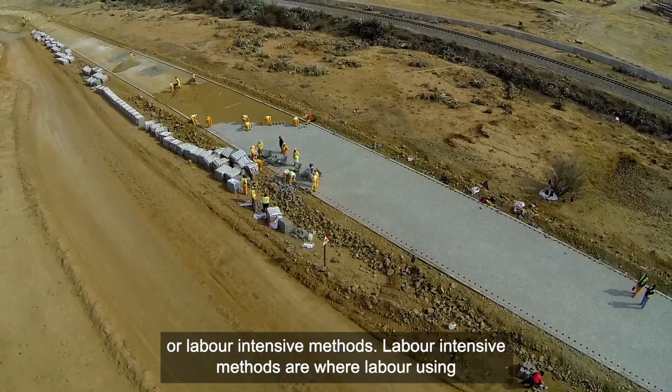What is the link between roads and the climate crisis? Roads are primarily designed for the transportation of people and goods from one place to another, safely, comfortably, and expeditiously. Roads can be constructed using machines or labor-intensive methods. Labor-intensive methods are where labor using hand tools is the primary resource and is supported by light equipment if necessary, thereby creating more employment.

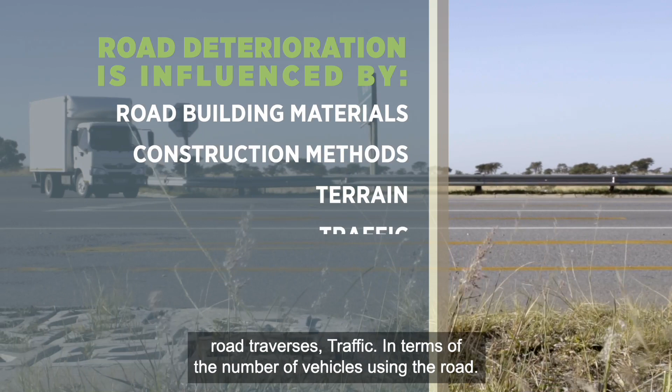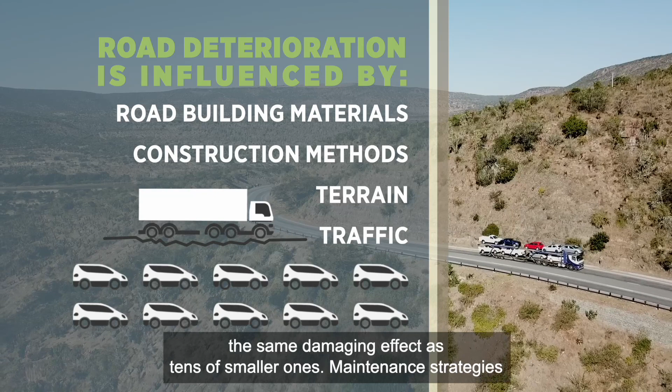Traditionally, road deterioration is largely influenced by the following variables: road building materials, construction methods, terrain along which the road traverses, traffic in terms of the number of vehicles using the road, and the proportion of heavy vehicles to small ones. One heavy vehicle has the same damaging effect as tens of smaller ones. Maintenance strategies and environmental conditions. Quite often, these variables act in combination.

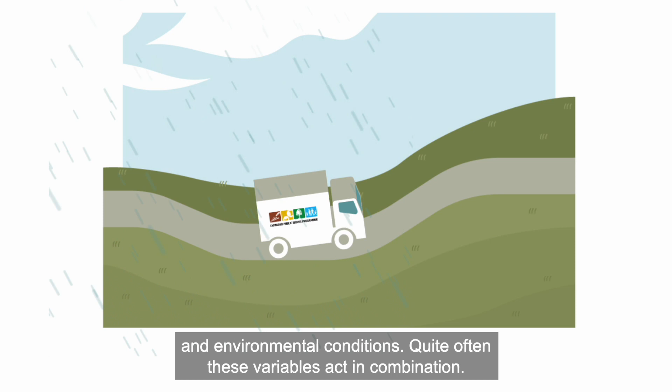For example, use of substandard construction methods, utilizing poor quality materials in hilly terrain, in a high rainfall area, on a poorly maintained but highly trafficked road with heavy vehicles is a cocktail for disaster. But the most important factor accounting for road failure is water. The effect of water can, to a large extent, be controlled by the drainage that is provided.

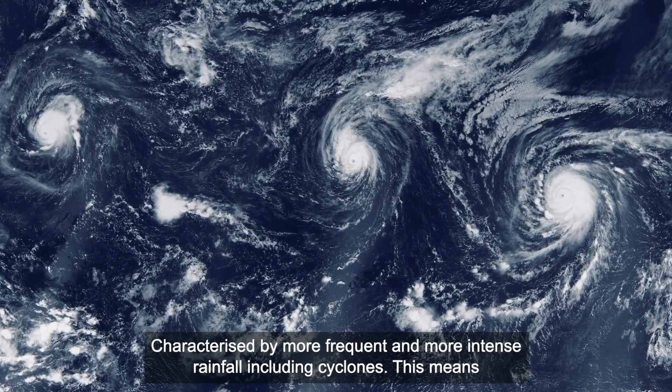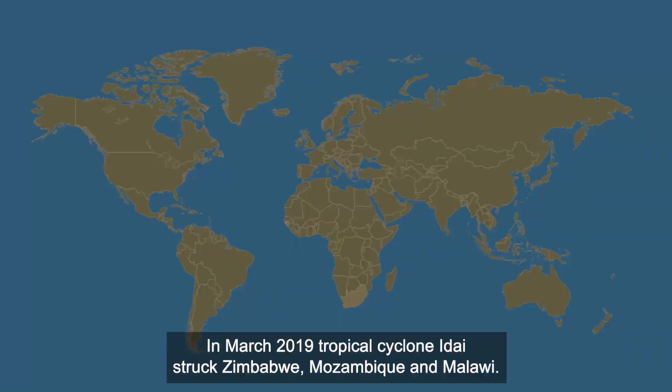The climate crisis is manifesting in unpredictable weather patterns, characterized by more frequent and more intense rainfall, including cyclones. This means a lot more water. In March 2019, Tropical Cyclone Idai struck Zimbabwe, Mozambique, and Malawi. Cyclone Idai is recorded as one of the worst tropical cyclones on record to affect Africa and the Southern Hemisphere.

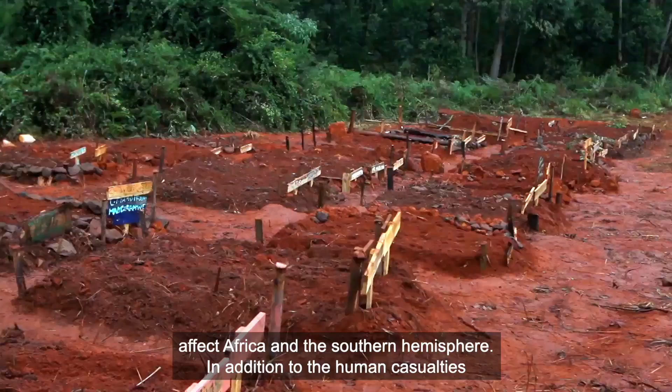In addition to the human casualties, infrastructure, which includes roads, was destroyed. In April 2019, floods damaged infrastructure in South Africa, including houses, roads, and bridges. I had the opportunity to visit Mozambique, Zimbabwe, and South Africa to do post-disaster assessments of infrastructure that was left damaged.

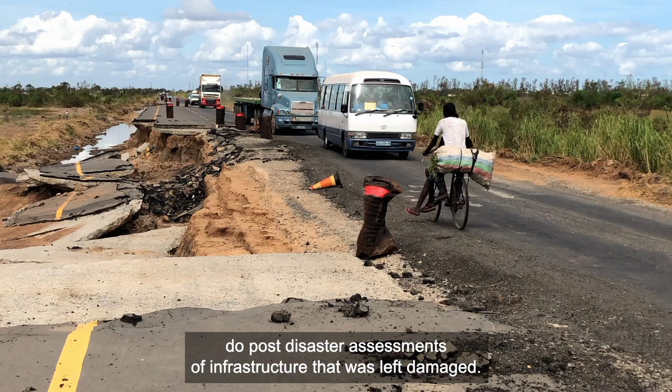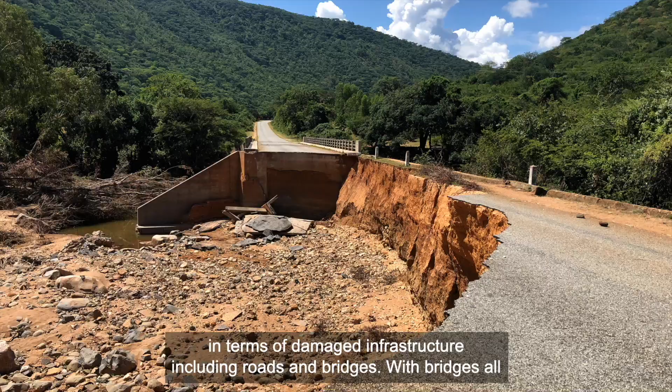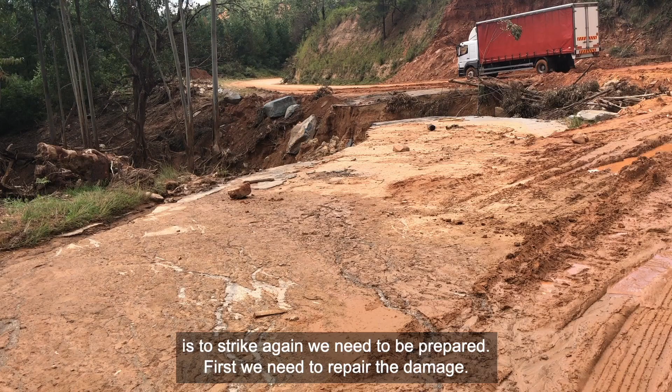Besides the loss of human life, these disasters left a trail of destruction in terms of damaged infrastructure, including roads and bridges. With bridges, all of them overtopped. The parapets got damaged, the approaches to the bridges, the fill material was eroded away, the superstructure was left standing. If a disaster of similar magnitude is to strike again, we need to be prepared.

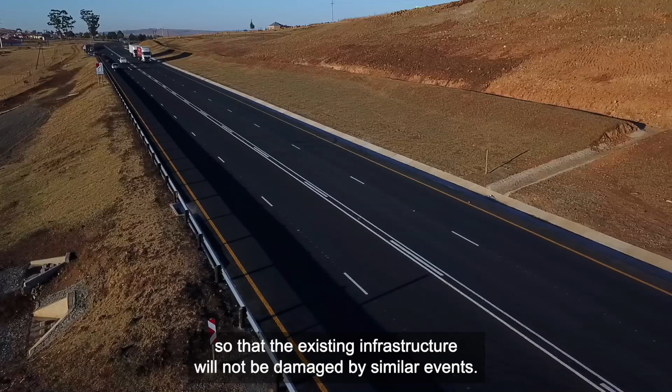First, we need to repair the damage. It's not simply putting back what was there. We need to build back better so that if a similar event occurs, we have less damage, if we get damage at all. The next thing we need to do is to climate-proof the infrastructure that was not damaged. This means we have to go back and do some retrofitting in terms of improvements so that the existing infrastructure will not be damaged by similar events. It is better to be prepared to know where your infrastructure is than to start looking for it post-disaster.

The third thing we need to do, we need to learn from what has been damaged and revisit our design standards. In the context of adaptation for roads, this may entail introducing better building standards for disaster risk reduction measures, using materials and construction methods that are more locally attuned and responsive to the local environmental conditions.

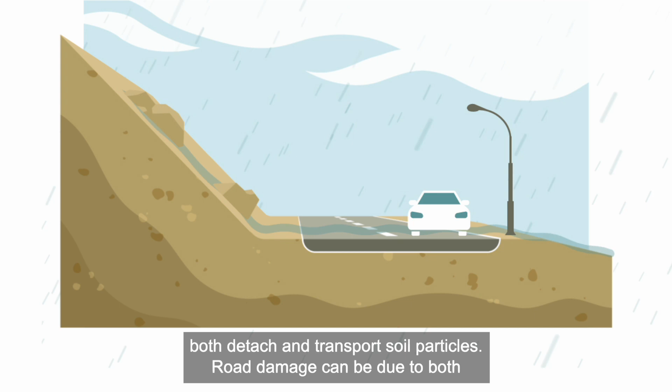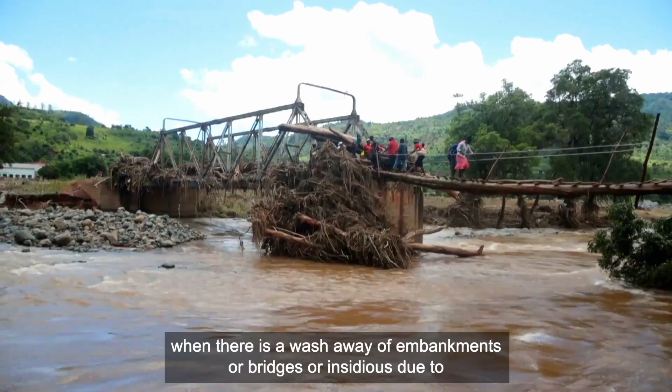Rainfall impact and runoff are the main agents of erosion because they both detach and transport soil particles. Road damage can be due to both surface and groundwater. Road failure can either be spectacular, such as when there is a washaway of embankments or bridges, or insidious due to the ingress of water weakening the pavement layers. Surface water damages the road, mainly by eroding the road building materials.

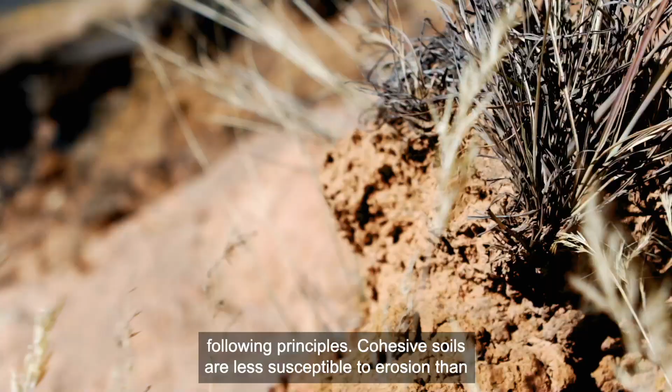Erosion is governed by the following principles. Cohesive soils are less susceptible to erosion than non-cohesive soils. The longer the slope, the more the erosion. The steeper the gradient, the more the erosion. The more the rainfall intensity, the more erosion. The more the vegetative cover, the less the erosion.

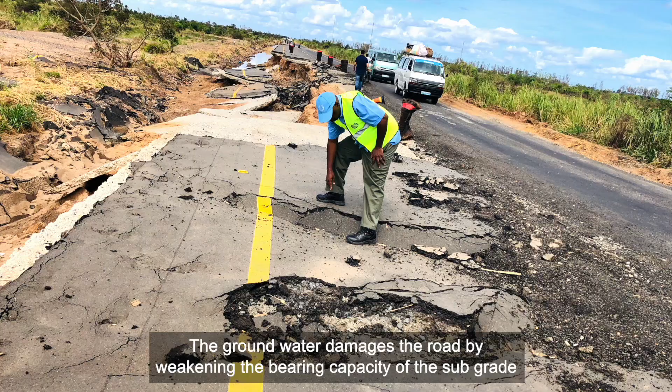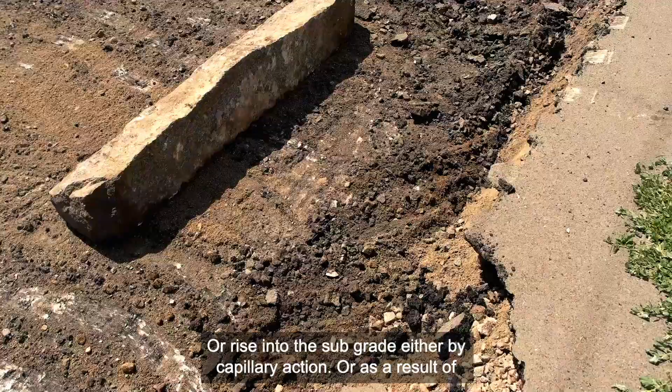The groundwater damages the road by weakening the bearing capacity of the subgrade and pavement layers. This water may infiltrate into the pavement from the top and shoulders, or rise into the subgrade either by capillary action or as a result of the elevation of the water table.

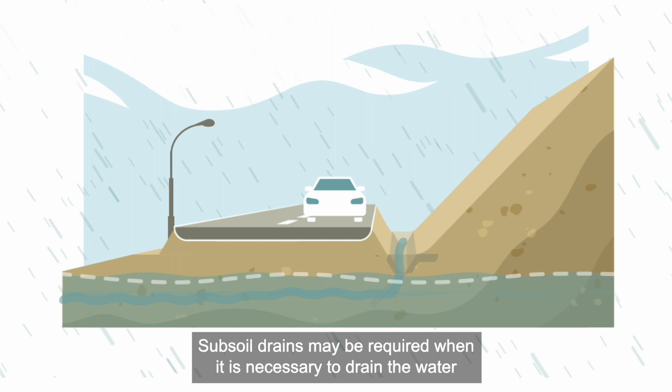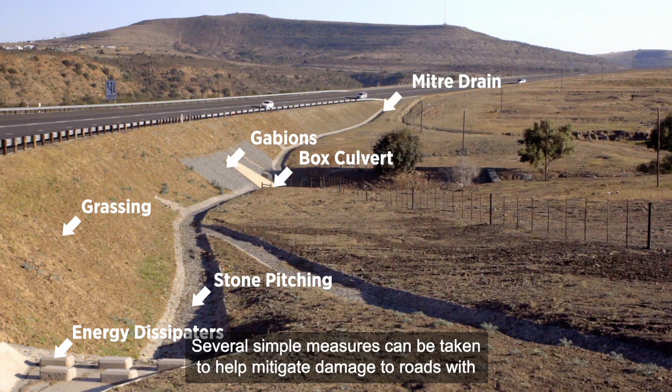Where a temporary or permanent water table exists, the road should be raised above the surrounding country. Subsoil drains may be required when it is necessary to drain the water from under the road or away from the backfill of the structures, such as bridges or culverts. Several simple measures can be taken to help mitigate damage to roads with regards to adequate road drainage.

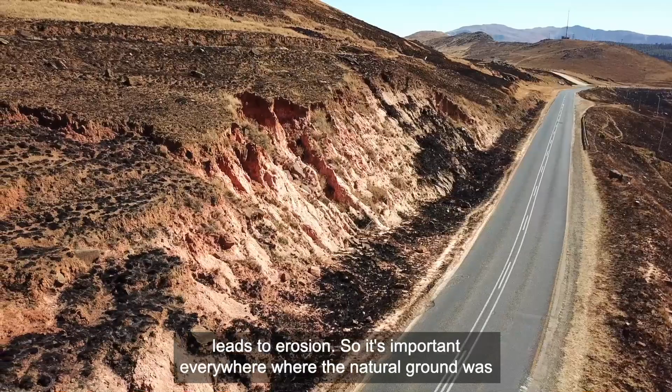So the overall purpose of grassing on a construction project is mainly for erosion protection. When there's grass, it slows down runoff, which essentially leads to erosion. So it's important everywhere where the natural ground was disturbed to try and establish grass as soon as possible if there's no other measures of erosion protection.

Consider the type of grass to be used. Grass that's indigenous to the area, that's adapted to the area, that will grow fast and that will also survive in the long run. Depending on where you use it, you also got to think of what type of grass you use, how big it will get, how tall, what maintenance is required. Some grasses require less maintenance than others, some last longer than others.

Hydroseeding is also a way of establishing grass growth. Grass seeds and fertilizers and mulch are mixed in and then sprayed over large areas. This mixture then allows for the fast germination of the grass, can be sprayed over long distances, can be used in inaccessible areas where it's not always easy to access by people, and you get good coverage if applied right.

You want to do it in the right time of year when there is some rain expected and also not too much that seeds might wash away. Cutting grooves along these slopes helps in retaining the seed in the grooves, because what you don't want is a big rain to follow a hydroseeding process, washing all the seed down to the bottom of the slope.

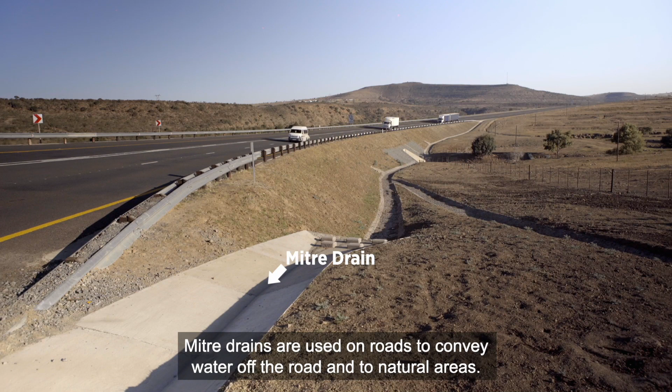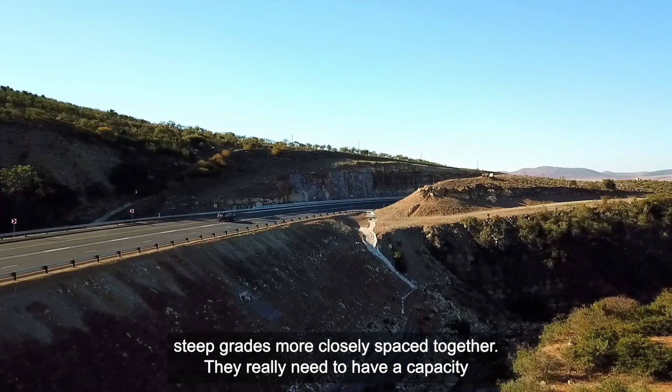Mitre drains are used on roads to convey water off the road into natural areas. Design considerations include having sufficient of them when you're on steep grades, more closely spaced together. They really need to have a capacity that can handle the predicted flow that that particular outlet would anticipate.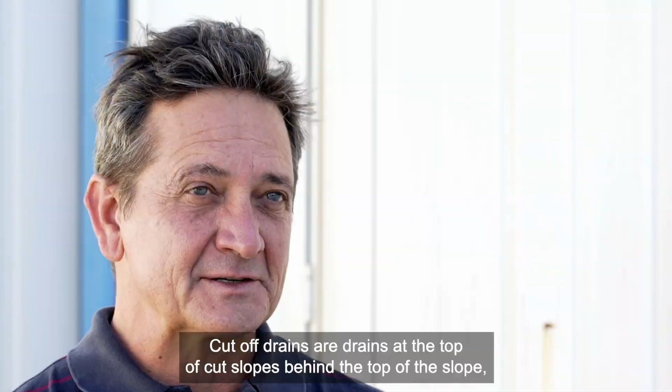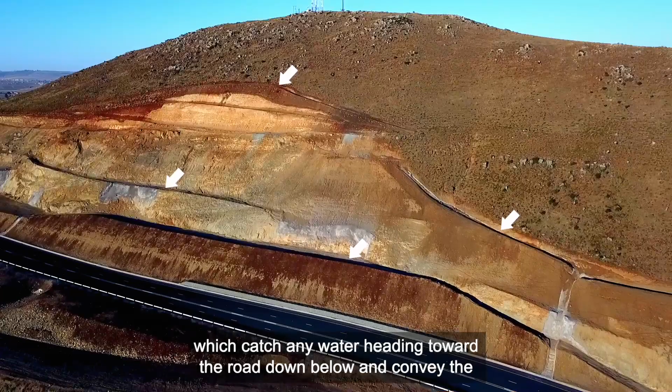Cut-off drains are drains at the top of cut slopes, behind the top of the slope, which catch any water heading toward the road down below and convey the water safely to the bottom of the slope on either side of it, then conveyed off to a natural water course.

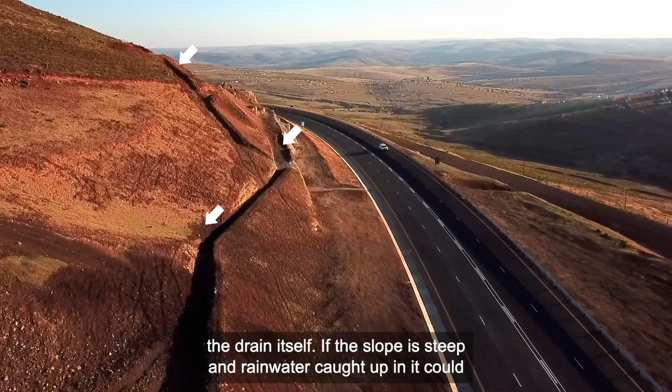When you construct a cut-off drain, you should consider the flow that it would carry. You need to consider the slope of the drain itself. If the slope is steep and rainwater caught up in it would lead to erosion of the drain, consider lining it with something like stone pitching or other means.

Energy dissipators are usually structures designed for the outlet of a drain. The main purpose is to slow down the velocity of the water before they let out into the natural environment to prevent erosion.

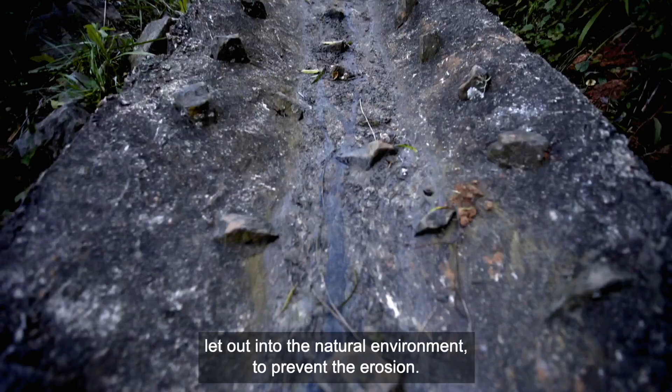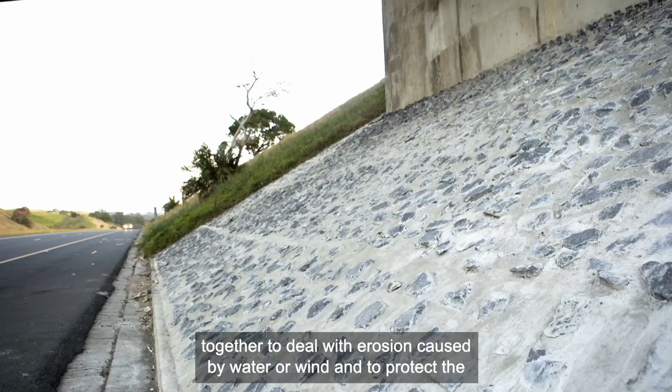Stone pitching is 300-200 millimeter type of size of stone packed tightly together to deal with erosion caused by water or wind and to protect the underlying earth. Sometimes stone pitching is grouted with cement or embedded in concrete where the flow of stormwater is anticipated to be high, in which case it would lead to erosion below the stone pitching were it not grouted.

By its very nature, it is a labor-intensive form of construction. If you use the same type of stones that's available in the environment, it looks good to the eye, but the main purpose is erosion protection.

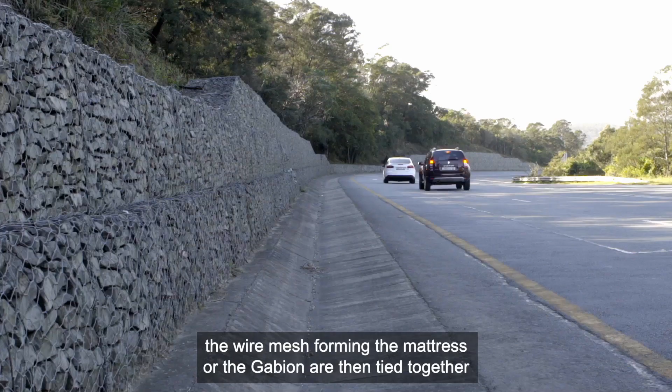Gabions are wire baskets in a cellular format, square cubic meter, or sometimes in a flatter format called Reno mattresses. They are filled with stone. The wire mesh forming the mattress or the gabion are then tied together. Gabions are used in earth-retaining structures but also they're widely used to cut down flow of water, to dissipate energy.

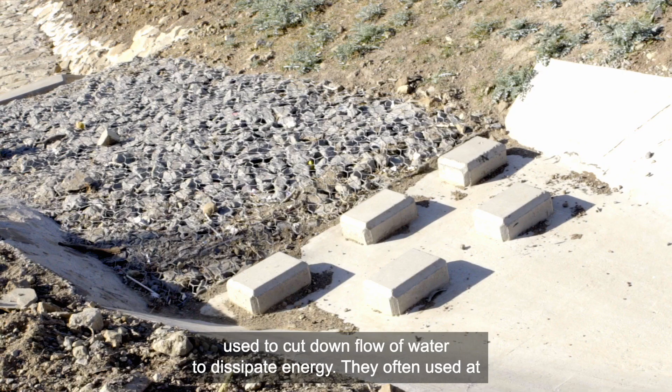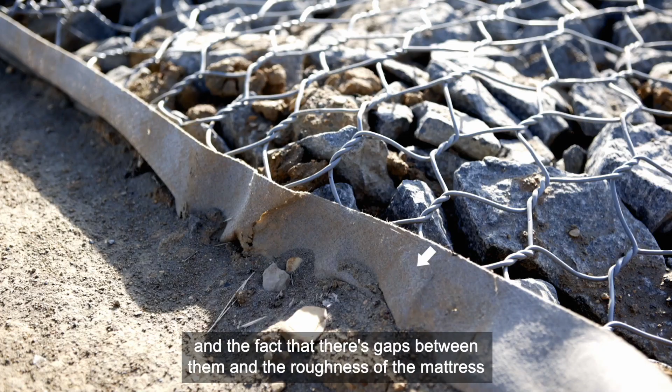They're often used at the ends of pipe culverts, where the pipe culvert discharges into the natural ground. The water would first go into a Reno mattress. The layout of the stone and the fact that there's gaps between them and the roughness of the mattress provides good energy dissipation.

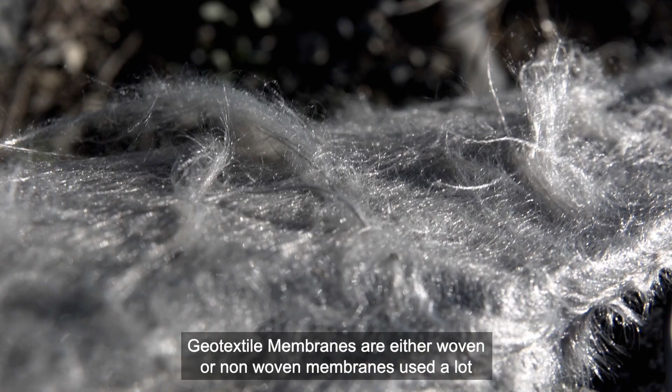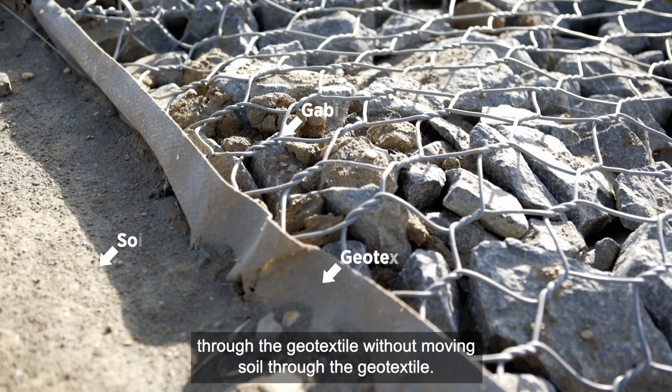Geotextile membranes are either woven or non-woven membranes, used a lot in holding and filtering. For instance, the geotextile would be positioned at the back between the soil and the gabion to allow the groundwater through the geotextile without moving soil through the geotextile. They would also be used in things like subsoil drains, crushed stone drains. It would stop the ingress of finer materials which would then clog the drain.

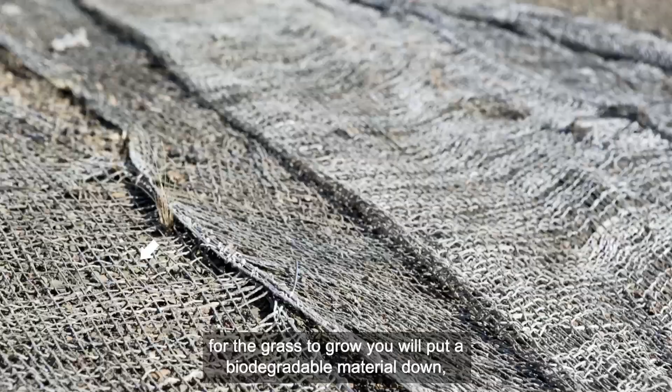Biodegradable material can be used in erosion protection. It's not a permanent solution, but it assists with the growth of the grass, so the hydroseed needs to be assisted. Usually on steep slopes where there's not much grip for the grass to grow, you would put a biodegradable material down, which will assist in holding down your seeds and your fertilizers until there's sufficient growth. Usually after a few years, this material will just degrade and will become one with the environment.

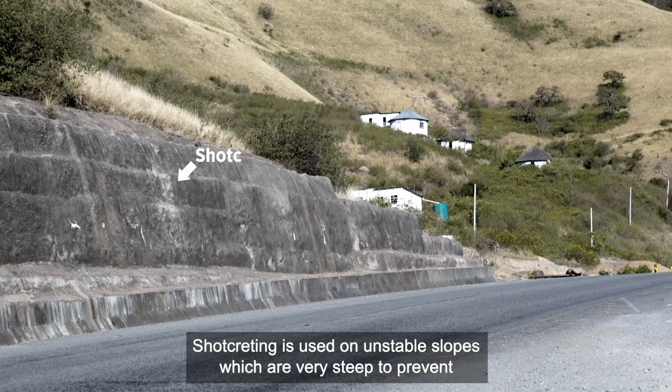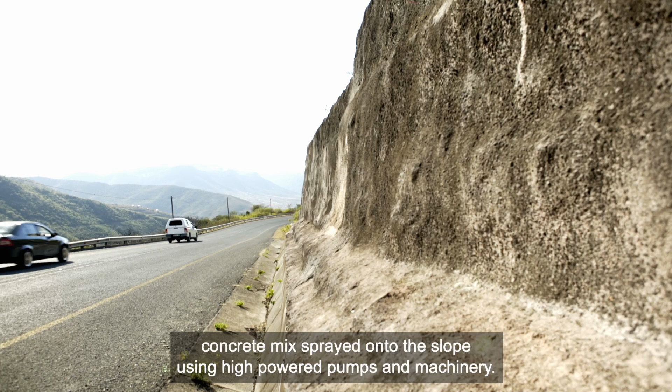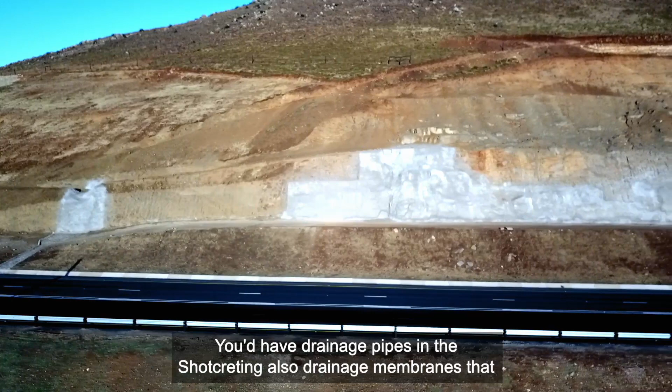Shotcreting is used on unstable slopes which are very steep to prevent the slope from collapsing. Shotcrete is used, and it's basically a fluid concrete mix sprayed onto the slope using high-powered pumps and machinery. You'd have drainage pipes in the shotcreting, also drainage membranes that would prevent the water from exerting any kind of force on the shotcreting.

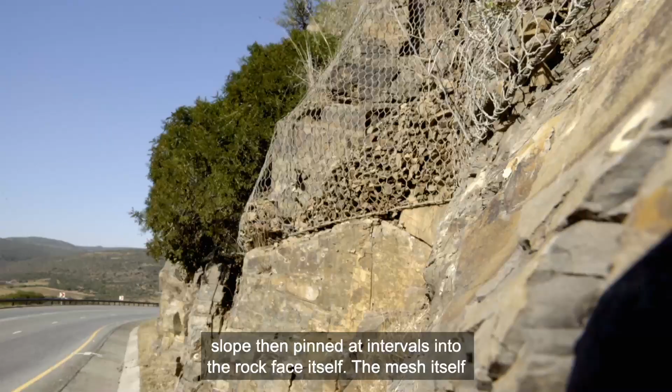In rock cuttings, it is difficult and costly to cut cuttings back to a safe slope so that rockfall is not a problem. So what is often done is that wire netting is pinned to the top of a slope. It is hung down the slope, then pinned at intervals into the rock face itself. The mesh itself has apertures 80 by 100, hexagonal. Hexagonal because it's double twisted so that if it cuts, it doesn't unravel. Diamond mesh would just unravel.

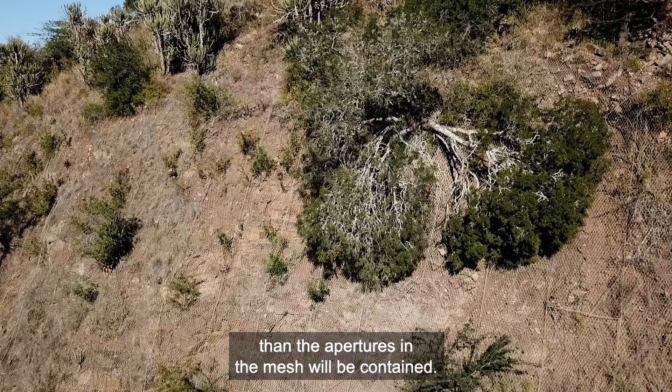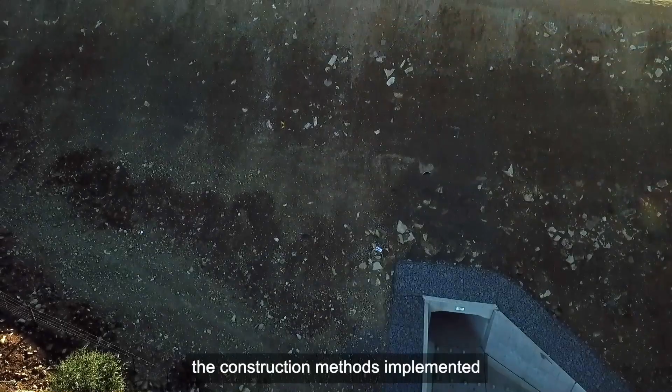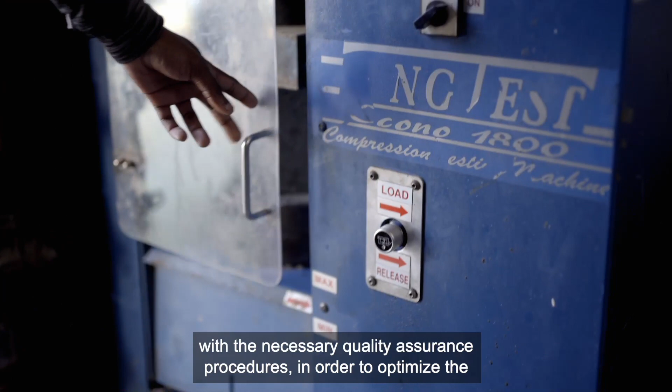The mesh serves as a containment of the rock that falls. Any fragments larger than the apertures in the mesh will be contained. Using wire mesh, one can also vegetate the slope by introducing pockets of topsoil and planting them up. Regardless of the construction materials used, the construction methods implemented, and maintenance strategies adopted, it is important to ensure compliance with the necessary quality assurance procedures in order to optimize the effective lifespan of any infrastructure asset.

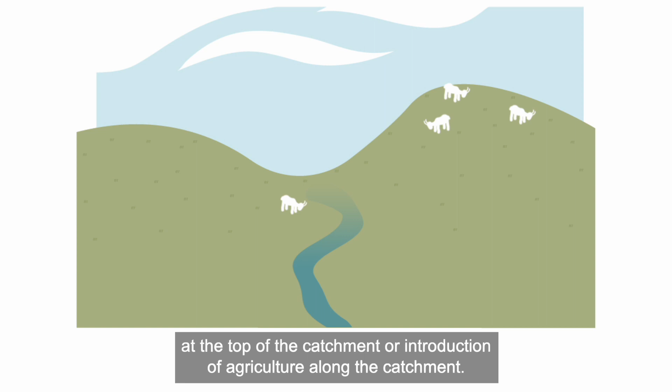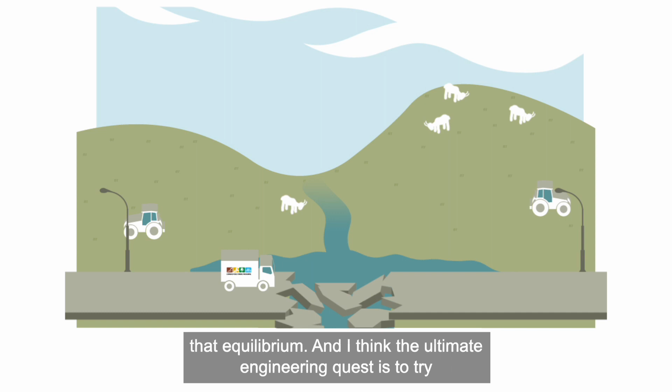When man goes into a catchment and fiddles with it in any way, be it overgrazing at the top of the catchment or introduction of agriculture along the catchment, any hard surfacing such as roads or towns and cities, we change the whole dynamics of the flow. So we look at the catchment in its entirety. Nature naturally creates an equilibrium, and where man has intervened, man has broken that equilibrium. And I think the ultimate engineering quest is to try and restore the equilibrium as naturally as possible.

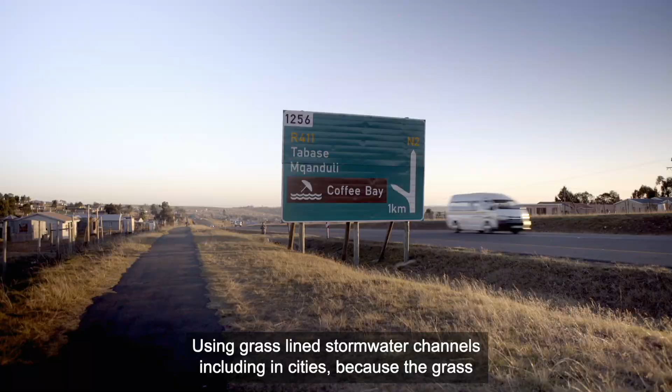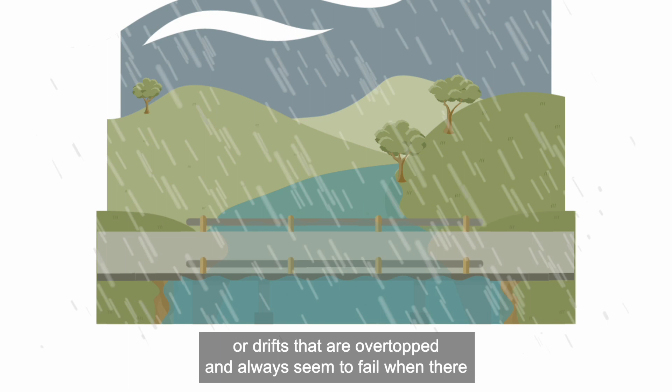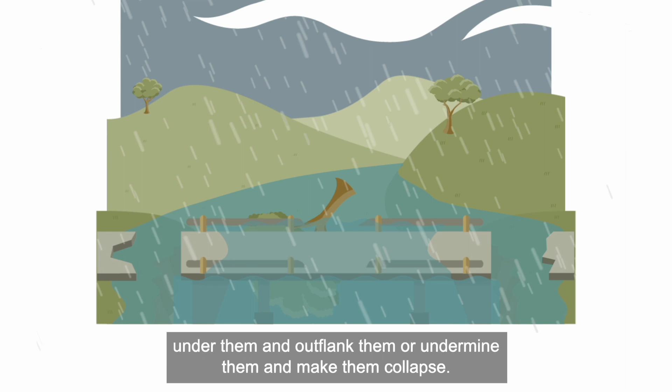Using grass-lined stormwater channels, including in cities, because the grass-lined channels absorb water but also slow it down. With bridges that are overtopped or drifts that are overtopped and always seem to fail when there's a big flood, the upstream side is where water will go behind them or under them and outflank them or undermine them and make them collapse. There are tried and tested methods that have been used throughout the world.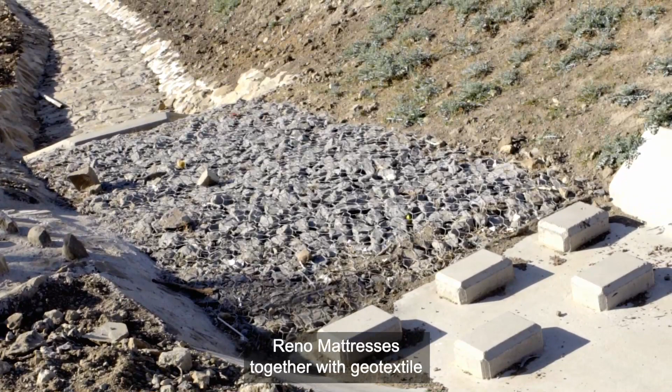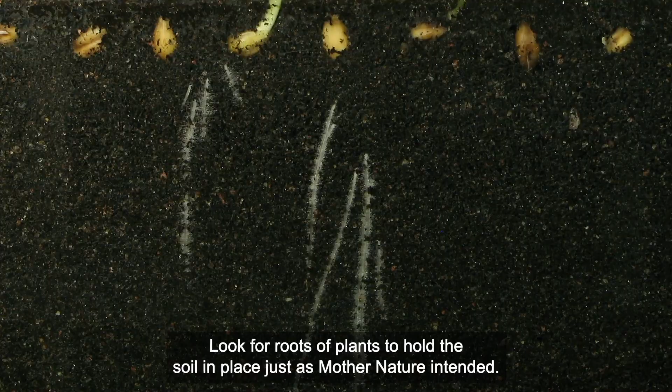Vetiver grass is a very good one because of its intense root structure and known ability to hold water. The Reno mattresses, together with geotextile below them, are quite effective. So is stone pitching in the right circumstances. But with something hard like a stone pitching, if you get a chink in the armor, you have a break in the structure, it'll tend to fail at that point. Look for roots of plants to hold the soil in place just as Mother Nature intended it.

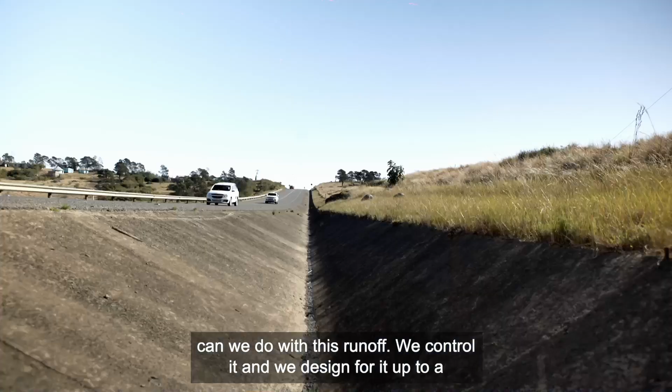While we're all focusing on drainage and how to control it, I think it's also important in a water-scarce country like South Africa to look at what we can do with this runoff. We control it and we design for it up to a point and then we let go of it. I think as part of drainage we also need to see how we can conserve this runoff water and reuse it.

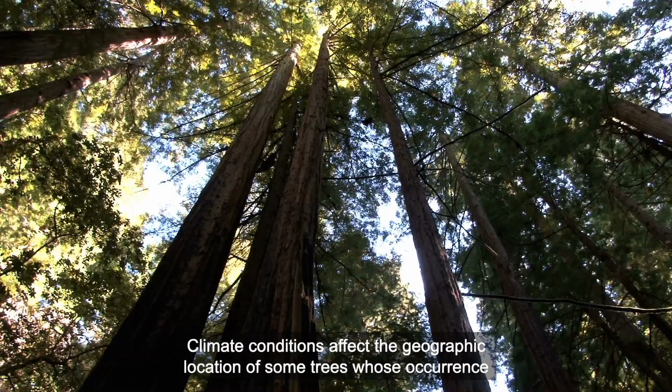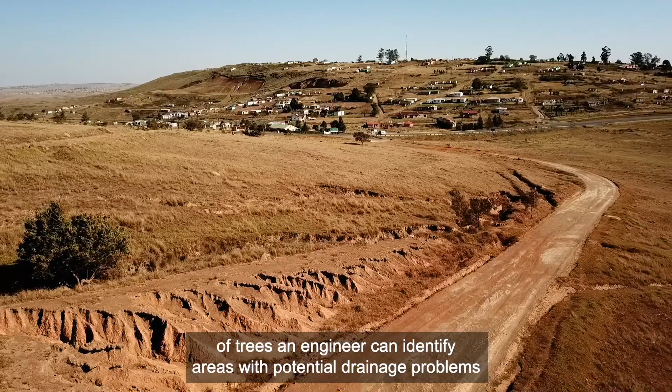Climate conditions affect the geographic location of some trees, whose occurrence may also be influenced by certain soil properties. Armed with the knowledge of trees, an engineer can identify areas with potential drainage problems in the road design process. Natural systems perform better than man-made systems in terms of disaster mitigation, which means us as humans, we fit our designs to what the rest of nature is doing.

As we transition to the fourth industrial revolution in a changing climate, it is imperative to leverage knowledge, tools and resources across non-traditional partners. Who knows, maybe one day we will build roads that perform better the more flooded they become.